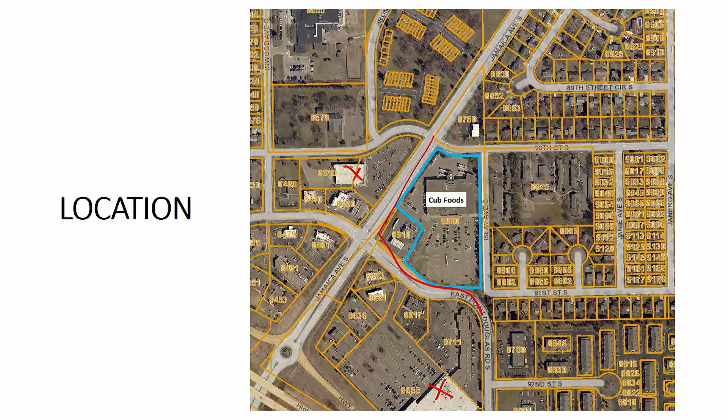If you don't know, Cub Foods is located just north. Target is down here, Aldi across the street. It is at East Point and Jamaica Avenues. Typically, you've seen in the past the greenhouse and landscape area located down in that southwest corner.

Cub has proposed, as a part of this interim use permit for the next 5 years, for their location to be up here in the northwest corner, part of that being closer to the building for easier Wi-Fi access, part of the POS or pay service. Makes it easier to connect that way.

The greenhouse would be approximately 21 by 60 in size, and it would also take up about 45 parking spaces. This would be the greenhouse as well as some of the outdoor storage of plants, landscaping materials, things of that nature. It is typically fenced, and I will note that there is a darn good existing natural buffer along Hinsdale Avenue there, so that we'll kind of tuck it in there.

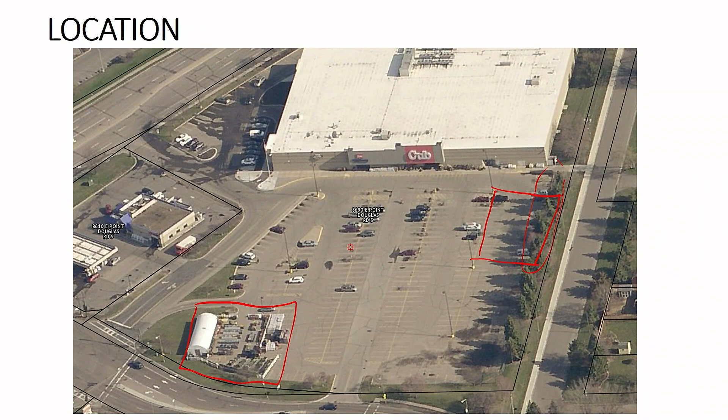As a part of an ICUP, there are conditions. One of those being that there is an annual building permit needing to be secured for the construction of the greenhouse. This requires an annual fee as well. A sign package will also be required as a part of that submittal.

We want to be sure that the signs that they're proposing are not freestanding signs or off-premise signs, but they can in fact be adhered to the temporary greenhouse structure. So we want to make sure that they're meeting that as well as the size. And with that, I know it's short and sweet, but if there are any questions, I know the applicant is available as well, but I will leave the recommendation.

All right, thank you. Would the applicant like to add any comment? Good. Nope. All right, thank you.

Chair Kabata. Yes, Commissioner Knable. I will need to recuse myself from this since I work for Cub Foods, but not the Cottage Grove location. Just want to give you the heads up. Thank you for the heads up on that. Good, step aside.

All right, well, with that, I will open public hearing. Is there anyone that would like to speak for or against the application?

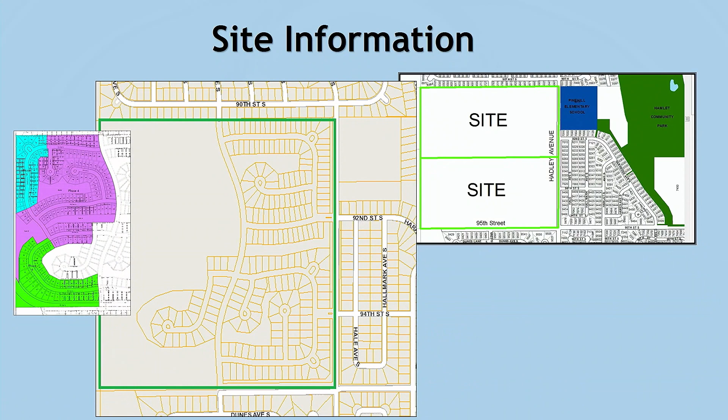So that will be going directly to city council. With this project, back in 2014, a different development company got concept plan approval for 383 lots shown on that drawing. In relation to that concept plan approval, there was a 2014 EAW, and that's what's being reviewed and updated as part of this application.

In 2016, Summergate companies picked up the project and presented Summers Landing First Addition, the first phase of the subdivision as you know it. In 2017, the company requested small lot concept approval before the Planning Commission and City Council, which added 19 additional lots - narrower lots allowing for the villa-style product popular on the market these days.

In 2018, Summers Landing Third Addition was platted. In 2019, an additional small lot request came in after the third addition, with 23 additional lots based again on different product styles. With those additional 42 units total from the original 383, staff felt we should review the EAW to see if any changes would require an actual environmental impact statement.

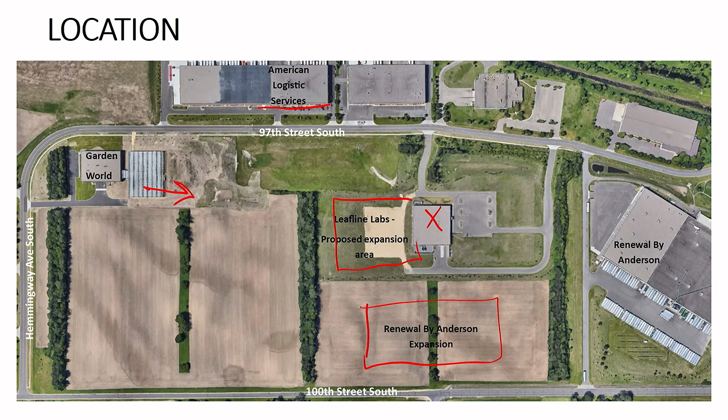With the construction of the new greenhouse, that is where the growing operations will take place, and then the production will take place inside the existing facility.

Again, the proposed expansion is for an approximate 129,000 square foot greenhouse. The 4,400 square foot link between the buildings is being proposed as restrooms and a potential employee break room.

Access will still be off of the existing access points on 97th Street. An access road around the new building will be constructed, a paved surface for fire access. Proof of parking is shown.

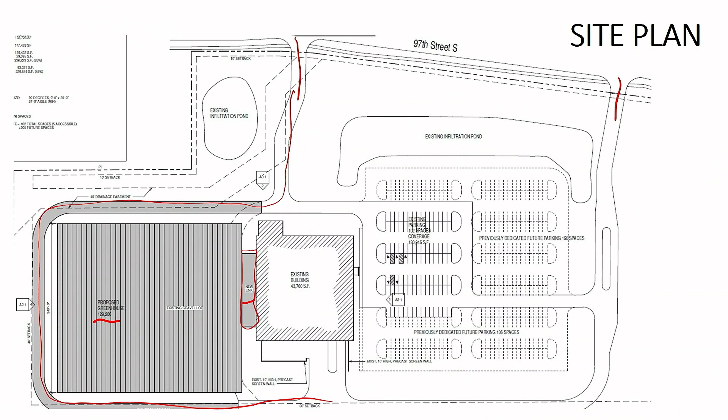Let me back up. The parking that is shown is the existing parking. The applicant is not proposing any additional parking as a part of this project. They are indicating that with the addition of the 45 employees on a second shift, there will not be an overlap of those additional employees at the site. So they have plenty of parking as is, but I will make note that they do continue to show that proof of parking, so if at any time they do feel like they are running low on parking, they do have plenty of room on their site for those additional parking spaces.

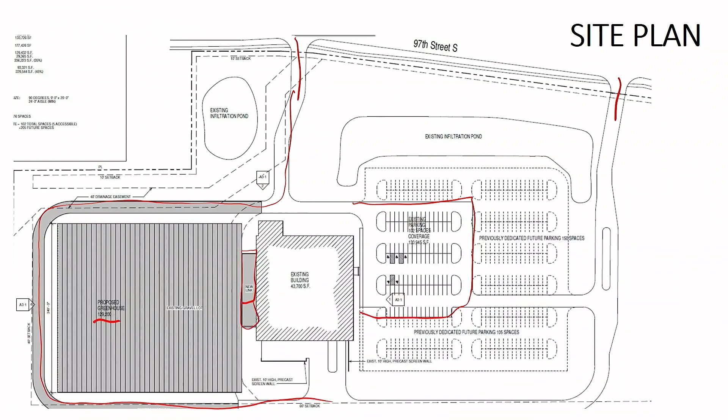There was a landscape plan approved in 2014, so the applicant did at that time install a handful of plantings with their initial construction. As a part of this expansion project, they will install some additional plants as well.

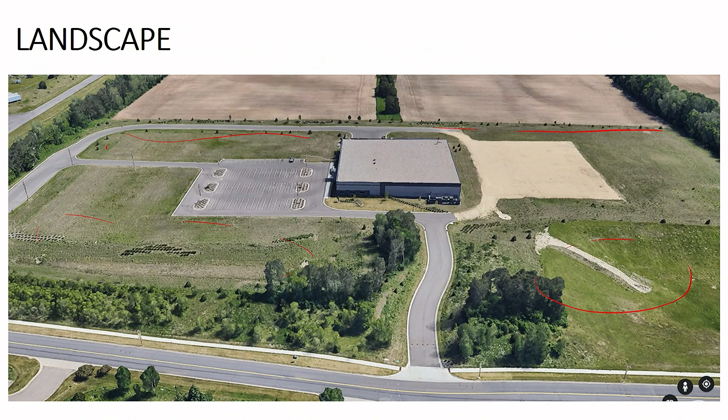I want to go to this next slide because this gives a better idea. You can see some of these young plantings along that south side there. The applicant has indicated that they will plant some additional plantings to create an even better buffer. The stormwater ponding on either side creates an even better buffer on that north side as well. So again, with the construction, there'll be a great natural buffer on either side of the project.

The proposed greenhouse is what they call a triple peak greenhouse. It will be a glass material—I do have an example that I can certainly pass around as well. This glass material does meet the zoning code requirement of a class 1 material, so it will be above and beyond the minimum 65% class 1 material requirement.

I'll make note that there is a potential for venting or the release of air at the top of the building as well as potentially at the sides. And the growing process requires strict 12 hours of darkness, 12 hours of light. So the applicant has indicated that it will be lit only between the hours of 4:30 a.m. and 10 o'clock p.m., 12 hours anytime within that range.

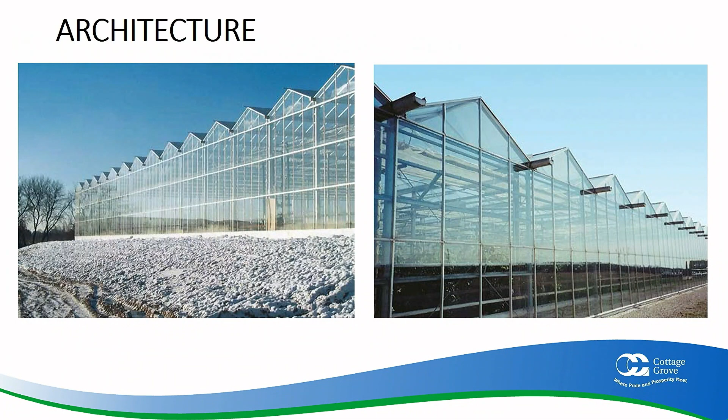And that leads me to odor mitigation as well as lighting. So when we start talking about lighting, they did provide a photometric study. We do not allow for greater than 1 foot candle at any property line of light spill.

They have indicated that it is just over 1 foot candle on that westerly side. So they've indicated they'll probably propose some additional plantings, trees and screening and such to keep that light off of the property line, at least below that 1 foot candle.

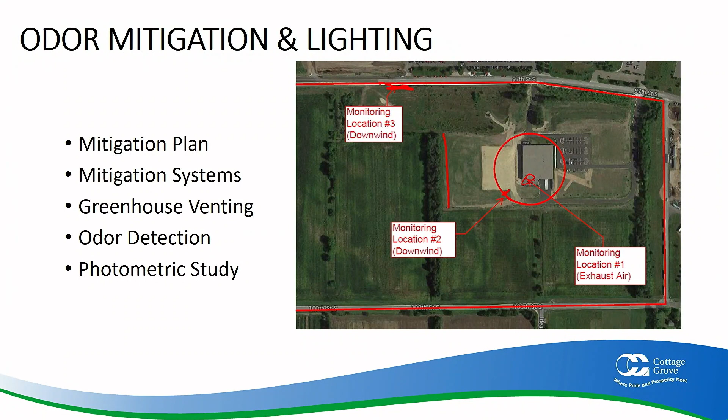Over the last handful of years, since 2014, the city has not received any complaints of odor. So ultimately, the applicant has not at this time had to mitigate any type of odor issue at the site. These same standards and conditions will hold true through with this expansion. So if anything were to be an issue, they would need to mitigate immediately. But again, they'll continue to test bi-weekly to ensure that those levels are staying low.

So with that, I know the applicant, Leafline, as well as APPRO, are here in the audience. If you have any questions for them, they're certainly happy to answer, as well as staff if there's any questions.

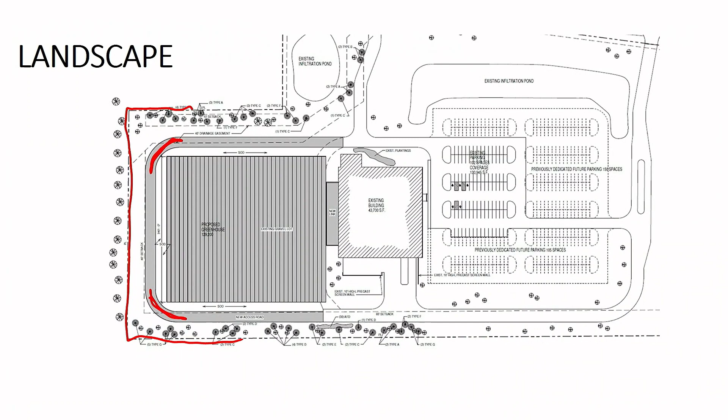At this radius? So the gray is the pavement and the white is going to be concrete sidewalk around the building? Okay, that answers my question. Thank you.

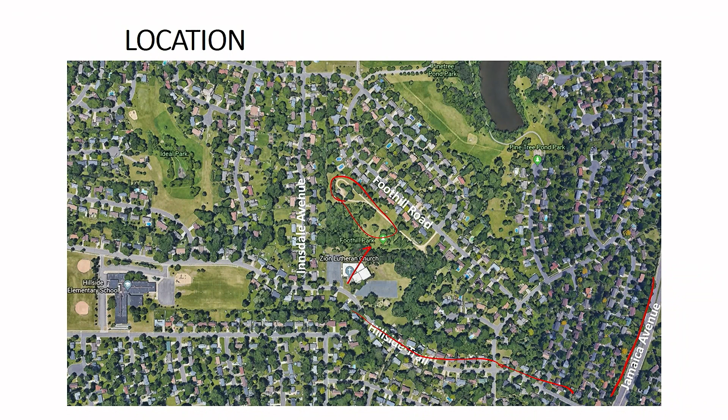This particular temporary building will be located at an open space just south of Foothill Road. To orient you a little bit, Jamaica Avenue and Hillside Trail. It is just north of Zion Lutheran Church, in an open space maintained by the city.

To give an idea of what the site would look like once the structure is completed within the neighborhood, a neighborhood meeting was held in December just to give neighbors an idea of what was happening and why. The largest concern from the neighbors was, of course, the removal of any trees within the space, and it has been indicated to them that trees will be, and actually have been, removed.

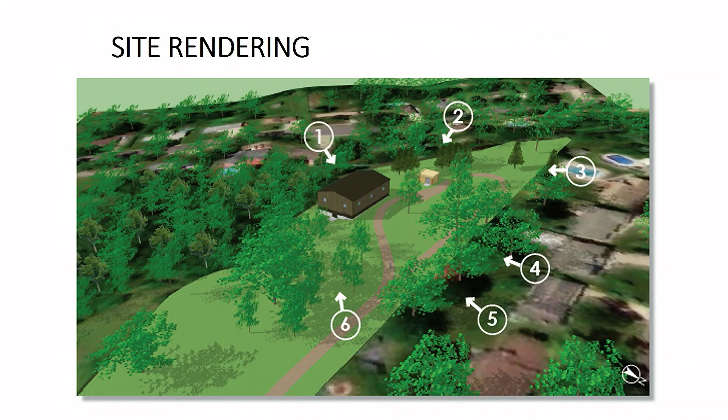But of course, we want to maintain that natural buffer between those neighbors. So as part of the project, an additional 14 trees will be replaced within the site to maintain that natural buffer. I'd also like to note that some of the trees that were removed, our forester has indicated, were diseased, dead, or dying, so it was almost beneficial to the site to clean that area up a bit.

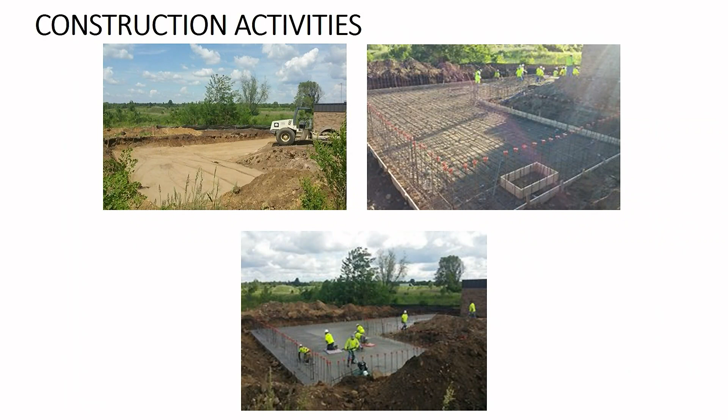To give an idea of construction activities, this was the construction of the 2 temporary sites in 2017: grading, forming foundation, and then the slab is poured. The intent is for these activities to begin at the beginning of February, as soon as possible.

The next part of the construction activity will be the installation of the carbon filters. I believe 8 is the number that will be installed, as well as all of the interior plumbing, and then the walls of the structure will be constructed around those carbon filters. Again, as I mentioned, this is an ICUP - the building is temporary in nature, and ultimately the plan of the city is to remove it at such time it is not needed.

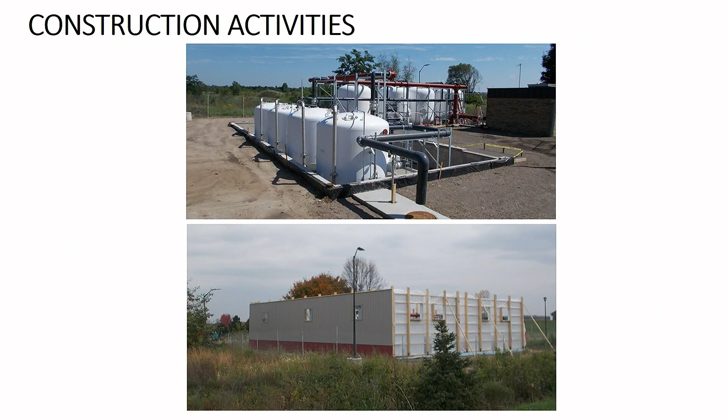I'll indicate we've requested 5 years for the ICUP in hopes that within 5 years we'll have a permanent solution for the treatment of the water. If at that time we do need an extended period for these temporary treatment plants, we will have to apply for an ICUP at that time to extend.

With that being said, I will leave the recommendation before you, but I am here, as well as our engineering staff, if there are more detailed questions about the application. Thank you very much. Questions or comments from the commission?

Commissioner Rasmussen: We've been hearing a lot about these temporary filters for quite some time, but it seems like there's never any forward momentum on a permanent solution. I know it's not everybody here at the city, there's a lot of people working on it, but let's say this needs to go on for another five years, or the permanent solution is just this—replace the carbon filters. Are these buildings able to be upgraded to a point where they do meet city standards? I don't want these to stick around for another 10 or 15 years with the city kind of dodging out of meeting the development standards that everybody else has to comply with.

Yes, Commissioner Rasmussen, that's a very good question. For the last year and a half, City Administrator Jennifer Levitt and myself have been participating in the 3M settlement agreement working groups. It's gone on longer than the state initially indicated—they were going to have a plan in place by December, but there was a few months' delay due to issues with modeling and other legitimate reasons. Right now we're at March, April, where they'll have recommended solutions for each metro community, so we're getting very close. They'll have one-on-one meetings with cities to discuss it. Staff and the council have been adamant that we want to stay on city water. They're also looking at regional options, like a surface water plant on the Mississippi, but those are pretty major changes, so that's our confident route.

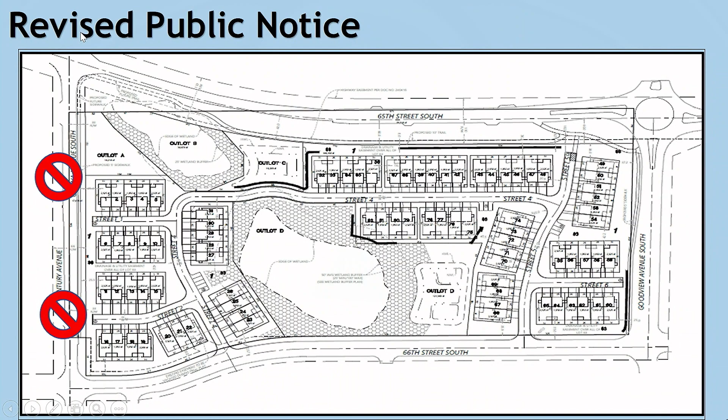So the first request is a zoning amendment to change the zoning of 14.4 acres of vacant land located at the southeast corner of 65th Street and Geneva Avenue from AG2 agricultural to R5 medium density residential. Second, a preliminary plat for 82 individual, zero lot line residential lots, one common lot around the HOA portion of the development, and three outlots for creation of a multifamily townhome development.

If you recall, the project is located south of 65th Street, to the west of Oltman Middle School, and to the east of Geneva Avenue, or Century Avenue, depending on the community's perspective.

There are existing wetlands on the property, and the watershed district did agree with the delineation of those wetlands. There is an existing homestead and accessory structure on the property that would be removed as part of the construction process. There are existing trees on the site that would be removed through the grading process and mitigated, which we'll get into in a little bit.

The current address of the site is 6193 65th Street South. So what we have before us is a current rendering of the project showing landscaping, the wetlands, and then the new ponds that are created as part of the project.

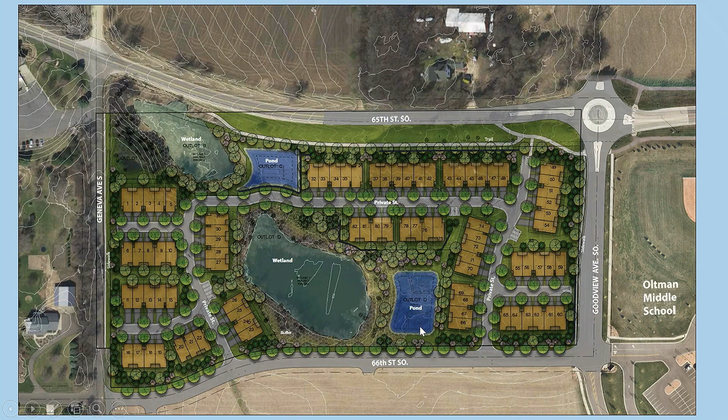The existing adopted land use for the 2040 comprehensive plan is medium density residential. The existing zoning is AG2 and would be going to R5 medium density. If you recall, we reviewed this site back in 2019 as a concept plan.

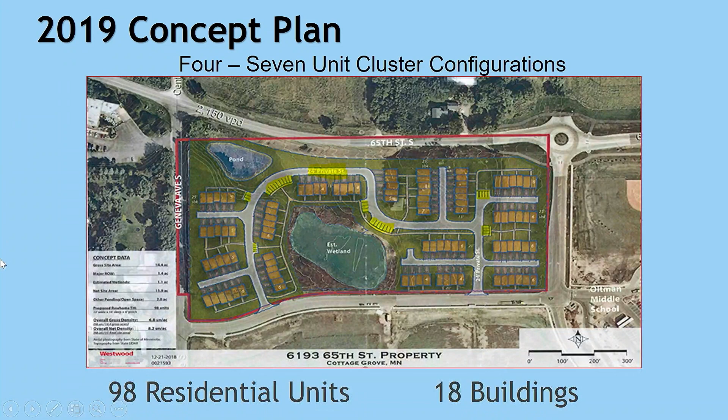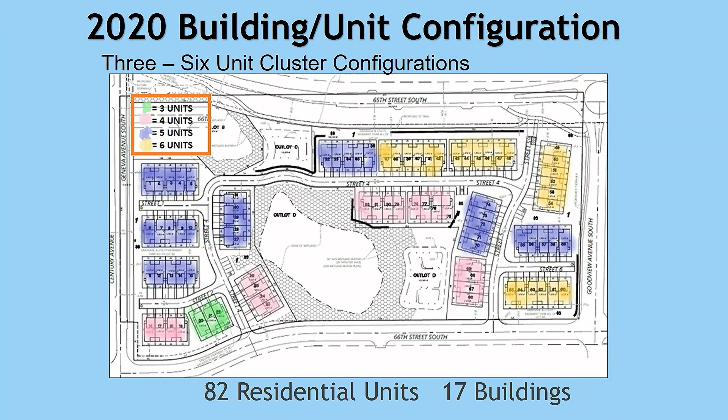With that, there were four 7-unit cluster configurations of buildings, 98 residential units, totaling 18 buildings. The current building unit configuration is 82 residential units, 17 buildings, ranging from 3, 4, 5, and 6 units depending on where they're located in the subdivision. This graphic identifies those different building sizes.

The medium density performance standards refer back to the R4 zoning district. Per the zoning ordinance, the narrowest portion of a lot abutting a public right-of-way is the front of the project, which is this location here. So the front yard is 66th Street, with a 30-foot front yard setback, a 35-foot rear yard setback along 65th Street, and 20-foot side yard setbacks for the corner lots located on Goodview and Geneva Avenues.

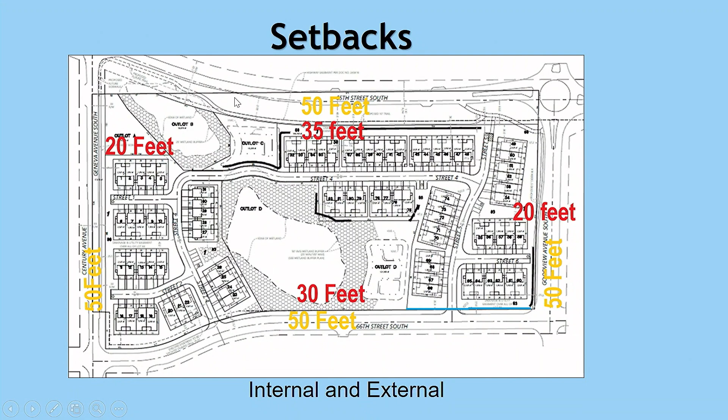One thing I should point out here, you'll note that they do have off-street parking as shown on the concept plan. They're providing 18, and 12 is the required number of off-street parking spaces above and beyond the driveways.

With the surface water management plan, there were some tweaks identified by the engineering comments, and those would be taken care of with the final plat and the final construction drawings. But again, there were 2 existing wetlands on the property.

They are providing the required minimum buffers, both in average and in width, on that property, and that's the little colored areas around the ponds and wetlands. They're also putting in 2 additional ponds, Outlot C and Outlot D, for rate control and infiltration. These wetland delineation or buffer areas are required to be signed, and we're working with the applicant to get the appropriate signage.

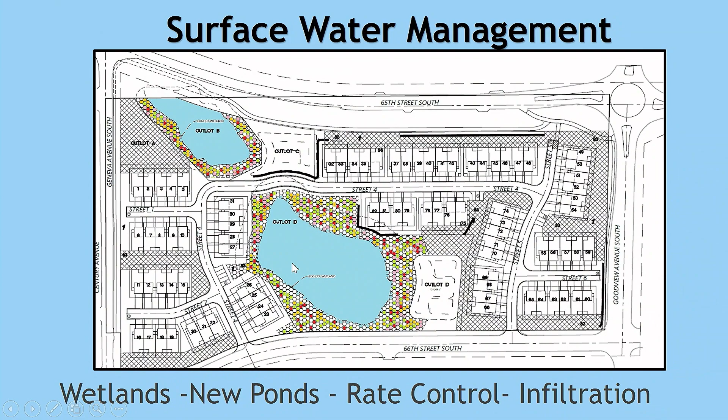Here's that rendering we looked at before, but what that shows is the landscaping that they are proposing. If you look at your plan set in the packet, there's a black and white drawing of that, but it's just not quite as detailed as the colored version.

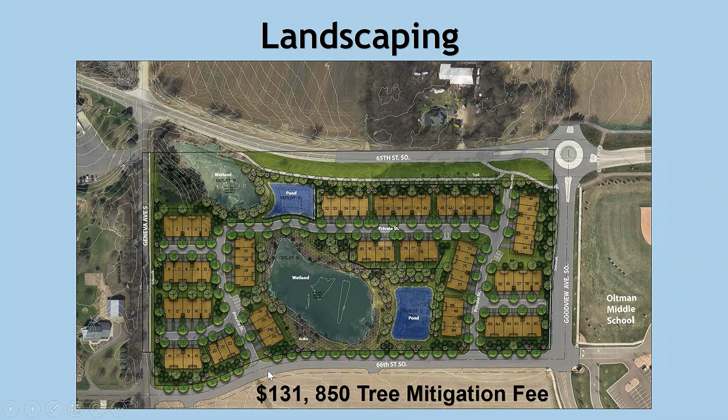For the trees that are not being replanted on the site, there is a $131,850 tree mitigation fee being required as part of the removal of the trees on the site.

As part of the park dedication requirements, the Technical Review Committee recommended that cash dedication be required for this project, given the location of the school, the park to the south, and other trails and parks in the immediate vicinity.

The trails and sidewalks included with the project would be sidewalks along the east and west local roads, and a transportation trail along 65th Street, including the area outside the project in this location, which would require a temporary easement. There is an existing transportation trail that was put in with the 65th Street roundabout project and other improvements.

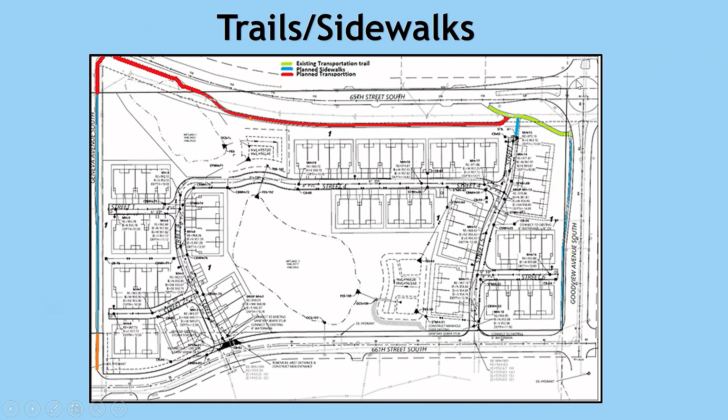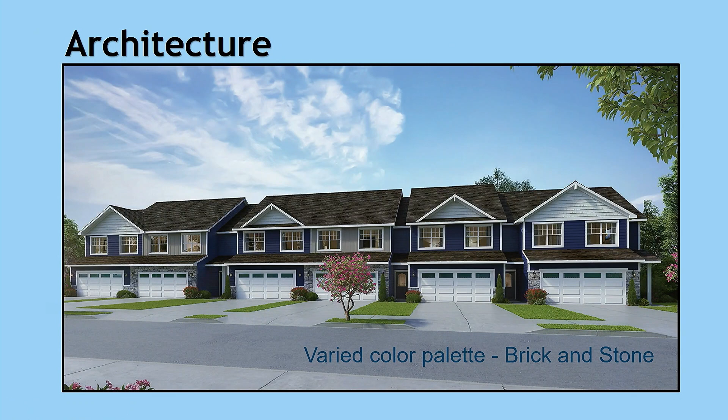One of the things requested during the last concept plan review was cross-sections showing the new project in relation to existing residential developments. So what you're seeing here are the 5-unit townhome identified and the existing accessory structure across the street. Right when you drive into the subdivision or down on Geneva Avenue, it's very evident where that building is. You can get a perspective looking at that building of what will be going on next door. I find this very helpful.

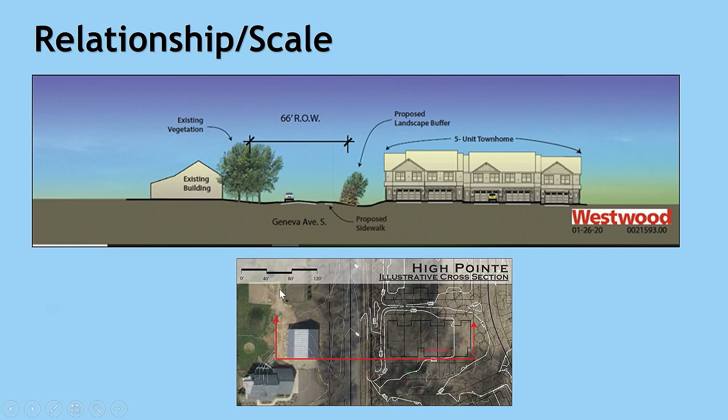In terms of transportation, the reduction of units also reduced the number of trips per day. The single-family units did not change. In comparison, if you were to have single-family units on that site, it'd be 520 trips per day based on the average density of a typical single-family subdivision.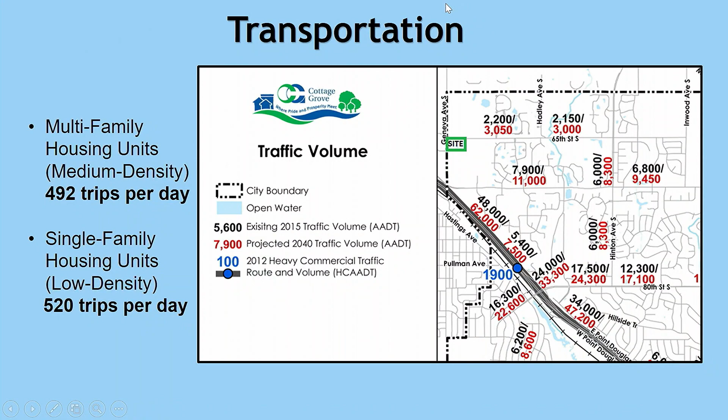What's identified on the map here are existing traffic counts and the 2040 traffic counts in red. What you'll see is that there's quite a gap available for additional traffic in those areas. Again, those roadways were designed and constructed for residential development in these areas, so it's not like it's just a development being plopped in the middle of a field with no traffic capacity to accommodate it.

Again, with the improvements that occurred around the roundabout and turn lanes and traffic lanes, one of the things that took care of are some of those things that would be needed with a newer development, given the previous state of those roadways, which were gravel roads and things like that.

One of the things talked about with the development to the north, which you'll be seeing coming up, is the potential to vacate the right-of-way north of Geneva Avenue, which would wind its way back to the roundabout to help alleviate some of the traffic concerns voiced at that 65th and Geneva intersection.

One other thing that should be noted is that ice was reported as a problem along this area. It turns out that the septic system for 10E packaging in that northwest corner of Geneva Avenue had a failing septic system, and they've since closed it off and are pumping about 2,000 gallons a month. They're under a temporary permit with the county, and we are working with them to provide service through this subdivision.

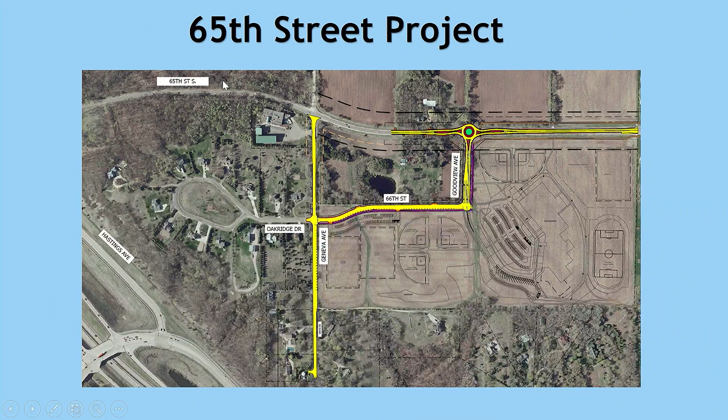The city of Newport would be required to process a comprehensive plan amendment, and things are moving forward there. The public works crews for the city of Newport said they would be monitoring this area for icing and things like that during the winter.

Through the planning process, we also coordinated with Washington County in relation to the additional right-of-way required along 65th Street and Geneva Avenue. That was a prescriptive easement in the area, which we'd be formalizing through the planning process. A small portion was already acquired with the Oltman Middle School plat. The access points are along 66th Street, servicing all 82 units.

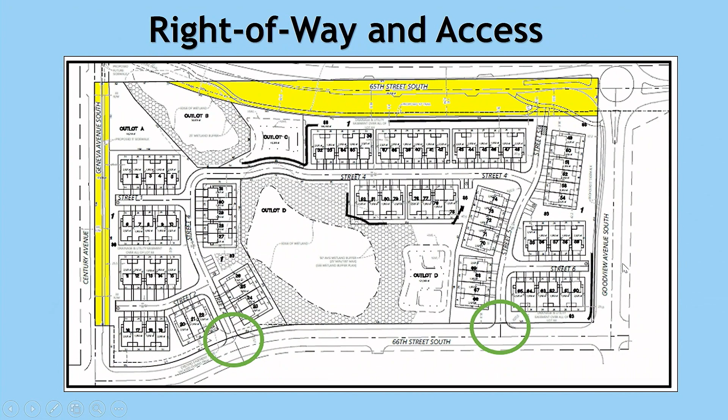The recommendation is for the Planning Commission to consider the zoning amendment to change 14.4 acres of vacant land at the southeast corner of 65th Street and Geneva Avenue from AG2 agricultural to R5 medium density residential, and second, a preliminary plat for 82 individual zero lot line residential lots, one common HOA lot, and three outlots for a multifamily townhome development. The applicants are here to answer any questions, and I'll stand for additional questions as well.

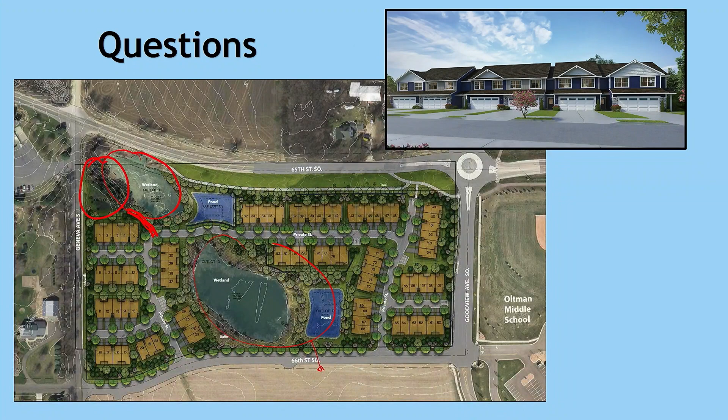Additional questions or comment? Commissioner Frazier: I guess just one question, this might be better for the applicant—the speaker asked about the dog park, and it doesn't look like on the drawings we've gotten, especially the one up on the screen now, that there is an access shown. I'm assuming it just didn't make it on there, but could you talk about that? So the dog park is in that area right there. It will be a private dog park just for residents of the community, and access would be through this area, with some sort of path. It hasn't been completely figured out yet, but that's where access would be. The acreage of that park is about 1/3 of an acre.

There was also a question about trees being removed. Not all the trees will be removed—there will be areas where we're saving trees, specifically in the dog park area with the taller pine trees, and areas around the wetland as well. Along Geneva Avenue, is there any special consideration for those trees, if there are mature trees as part of a screening plan? Because there's a sidewalk going through there now, those trees need to be removed—most if not all of them. And then as part of the final landscape plan, will trees be added back in? Yes.